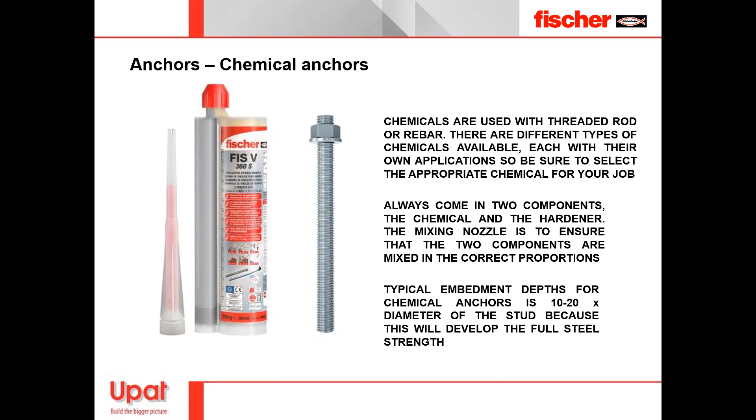So you get different types of chemicals, and each one has its own characteristics and properties. A bonded anchor is an anchor that's set into concrete after the concrete has been poured, and basically you get capsule systems or injection systems, and that's broken down into either polyesters, vinyl esters, or epoxies. Those are the three different types of chemicals which all the major manufacturers use to manufacture their products.

Epoxies are really the top of the range. Epoxies can be used where the hole has been cored, and epoxies can be used underwater. Epoxies take a long time to set, and typically an epoxy has a cube strength of around 120 MPa. One of the very well-known epoxies is the Hilti RE500, and the Fischer equivalent is the FIS-EM.

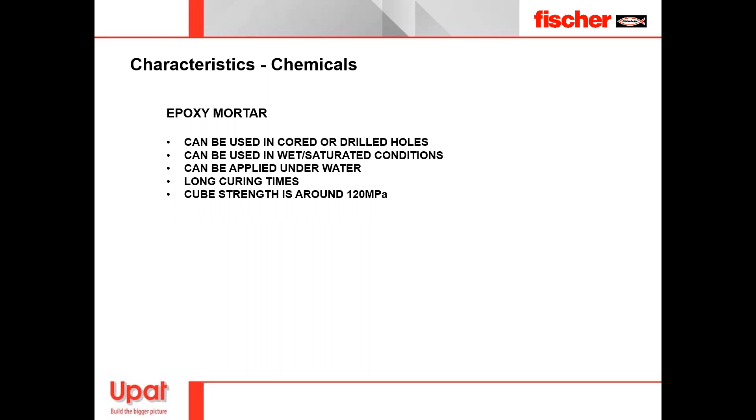Then you get vinyl esters, slightly lower performing. Not all vinyl esters can be used in cored holes; some of them can only be used in drilled holes. Some vinyl esters have cement in their hardener, so be careful, as they cannot be used in wet holes. Curing time is much shorter than that of epoxies, and they have a cube strength of around 100 MPa.

And then basically at the bottom of the ladder is polyester-based chemicals, not recommended for structural applications. Polyesters are sensitive to moisture, and if they're continually exposed to moisture, they're going to eventually lose their strength, and we'll see that in one of the case studies a bit later on. The cube strength is around 60 MPa.

So when one is using chemicals, you have to consider: has the hole been drilled or cored? Is it a wet or a dry hole? What are the curing times? What are the long-term temperature conditions? Has the hole been properly cleaned?

People always go on about price. Polyester is the cheapest and the lowest performing. Epoxies are the most expensive and the highest performing.

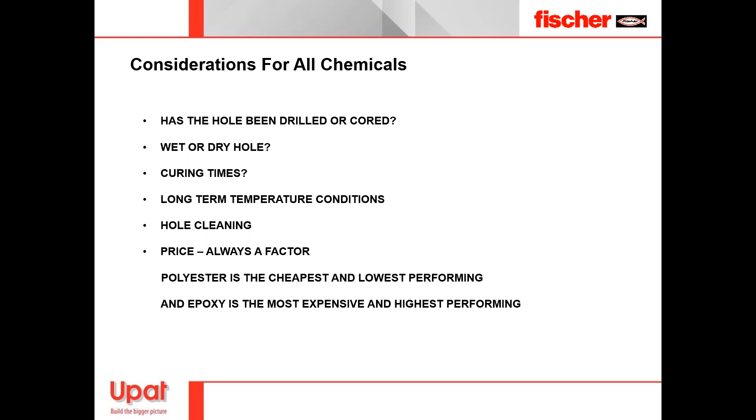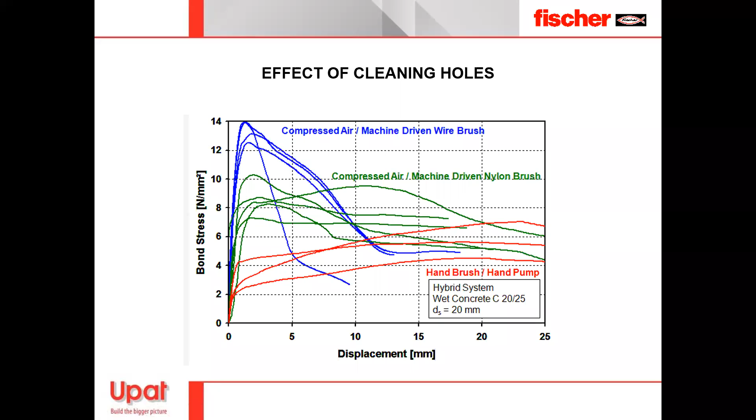Then if you go up with a cleaning effort, compressed air, machine-driven nylon brush, you can achieve higher bond stresses. And then compressed air, machine-driven wire brush gives you the best result. So really, all that boils down to is that the better the cleaning effort, the better the result you're going to get.

Okay, installation of a chemical in concrete. This is a Fischer training video. It's just illustrated to show you what needs to be done.

So the hole is drilled. It must be cleaned out. Blow, brush, blow is what all the manufacturers specify. And blow again.

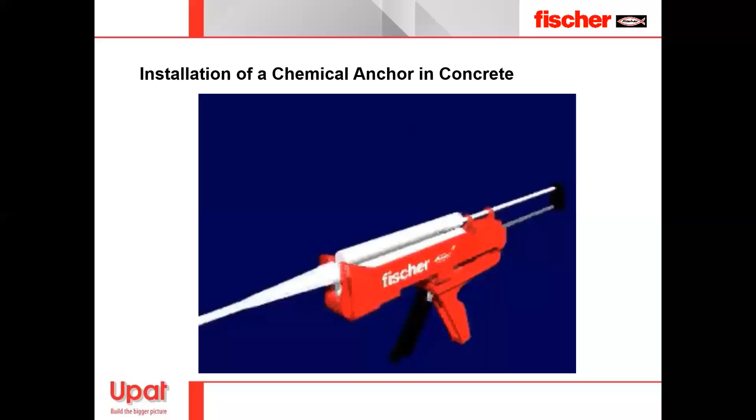That's a typical dispenser gun. One always has to give it about 2 or 3 squirts first before injecting in the hole to make sure that it's uniformly mixed.

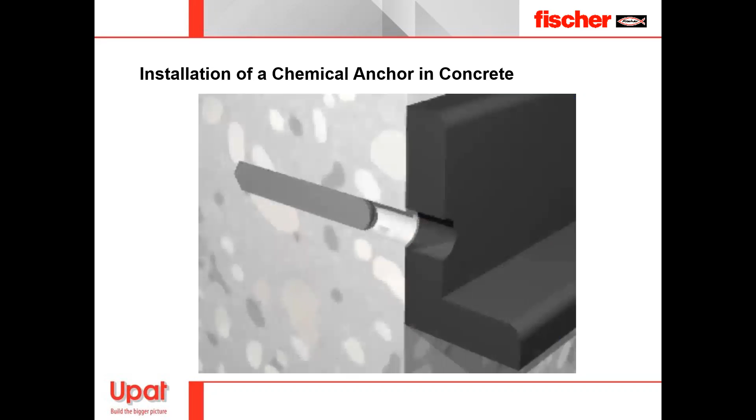Typical rule of thumb is you fill the hole about 2/3 of its depth with a chemical and then turn the threaded rod in to get maximum surface area contact between the chemical and the stud.

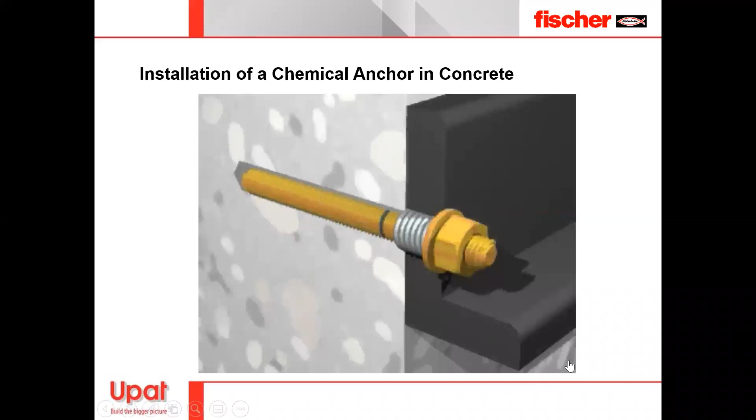And curing time depends on temperature. And that is the installation of a chemical anchor.

Then you get expansion anchors, and an expansion anchor comes from the old Rawlbolt. I'm sure everybody's familiar with the Rawlbolt, and these work on exactly the same principle. You have a wedge at the bottom end of the anchor with a clip, and as the anchor is tightened, that clip expands against the wedge and locks in the concrete.

A big advantage of this type of product over the Rawlbolt, and I'm not knocking the Rawlbolt, but its technology has been superseded, is that you can take any one of these anchors, either an expansion anchor or a chemical anchor, put your base plate down on the concrete, drill through the holes into the base plate and fix the chemical through those holes, which you cannot do with a Rawlbolt.

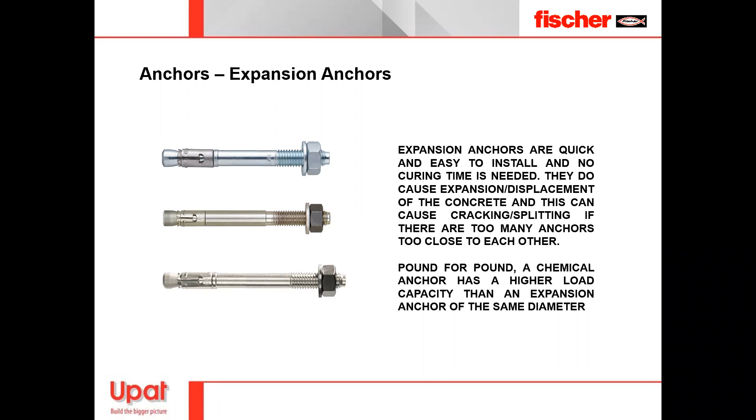An advantage of an expansion anchor over a chemical anchor is that expansion anchors can be loaded immediately. You don't have any curing times to worry about.

Then you get what's called an undercut anchor. An undercut anchor is basically an under-reamed anchor where a conical shaped hole is made in the concrete and the anchor is then set into the concrete. Very high performance, but they are expensive because they need special tools in order to install them.

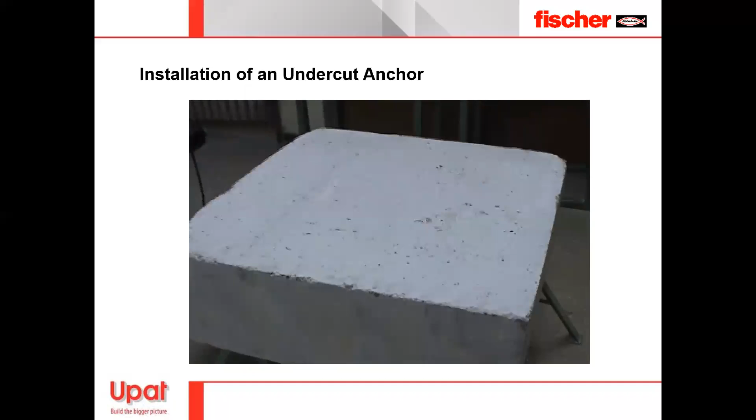So here is a video of the installation of an undercut anchor. I'm showing this because you'll see what happens at failure. You can see there's a special drill bit that is needed.

So the first thing they do is they drill the cylindrical hole. And now he's going to under-ream it. By reaming it in that manner, that creates the conical shape of the hole.

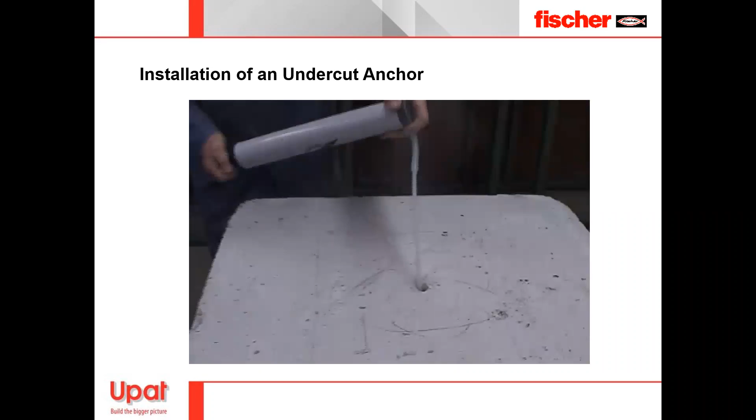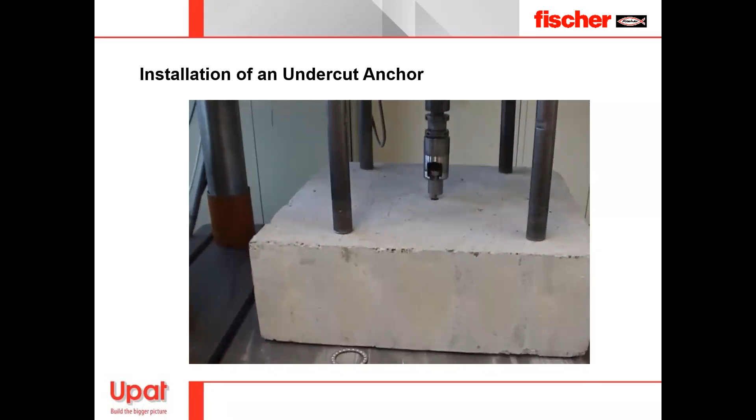And that anchor has a sleeve which is knocked down and it opens up on the inside of the hole. But you can see you need that special setting tool. So the anchor is protruding, the sleeve has gone all the way down. And now it is being tested to failure.

You can see this is a very old video by the type of computer that you're looking at. But the principles still apply.

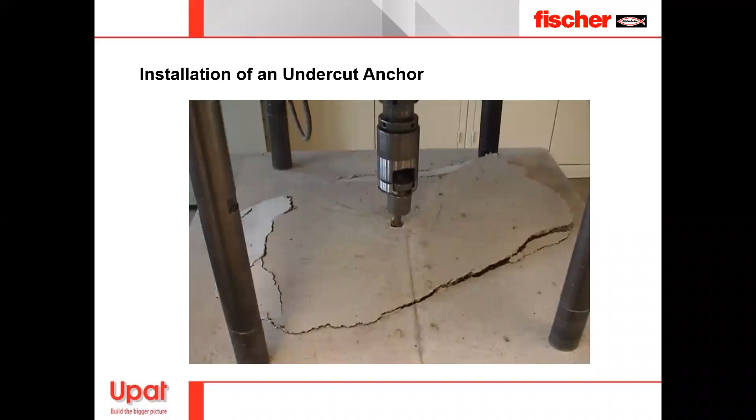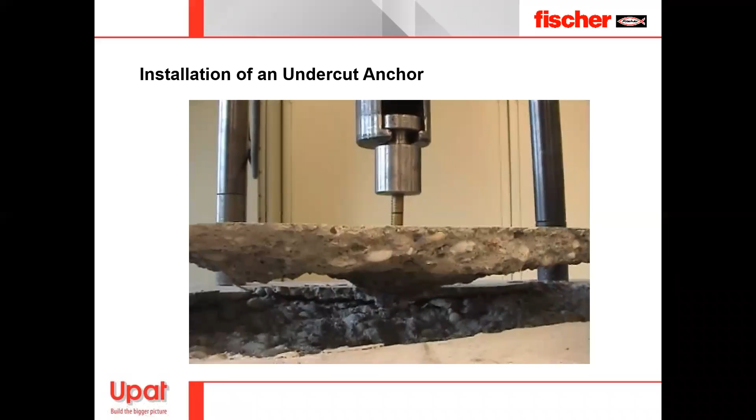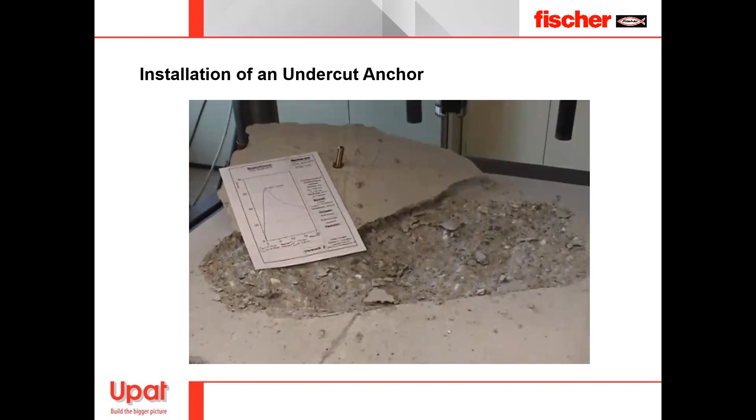So it has been loaded to the point where the concrete has failed. Now take note, you can see how the sleeve is opened up on the inside. And that is what we call the typical cone failure of the concrete. Cone failure is very prevalent, and it forms an important part of anchor design. There we go, that's the concrete cone. And that is actually a tensile failure of the concrete.

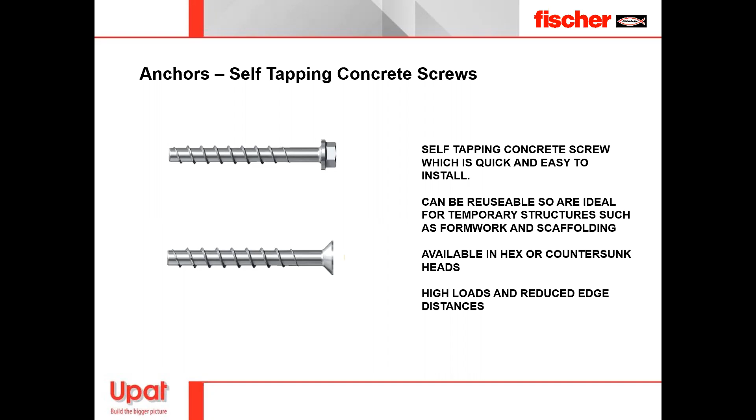Okay, then fairly new on the market is what they call self-tapping concrete screws. Quick and easy to install. They can be reused, and also because they can be removed, they're ideal for temporary structures such as scaffolding and formwork. They are becoming more and more popular. And the design principles are exactly the same, whether you use a chemical anchor, an expansion anchor, or a self-tapping concrete screw, the principles remain exactly the same.

Okay, so that's the code. The code comes from the Eurocode, and we, together with Hilti, and thanks to Professor Peter Day, got this accepted as part of the SANS code. And what this does is, when a group of anchors are acting together,

there are 4 possible failure modes in tension and 3 possible failure modes in shear. And the design then checks the resisting load for each possible failure mode and looks at the decisive case, and it does the same for each possible shear failure mode, then combines tension and shear, which your structures guys will know all about.

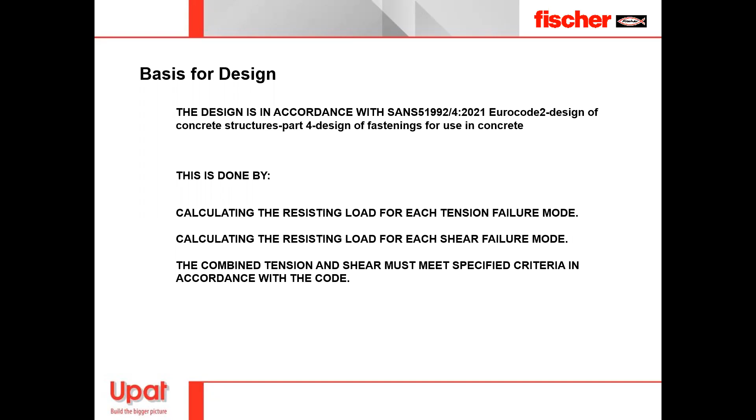So, if an anchor is in tension, the first possible failure mode is steel failure, direct failure of the steel, where the steel will fail in tension. That represents the upper limit on the load capacity of an anchor.

You can get concrete cone failure, which we've seen, and the diameter of the cone is typically 3 times the embedment depth of the anchor.

So this is now when the design principles start coming in. If an anchor is in tension and you have concrete cone failure, you can see that's the volume of concrete that is resisting that tension load.

Now, when you start spacing anchors close to each other, you will see that there's a bit of an overlap. So what this design philosophy code does is it takes the load capacity of a single anchor, and then it makes a whole lot of adjustments according to the geometry, applying adjustment factors to the basic resisting load for a single anchor.

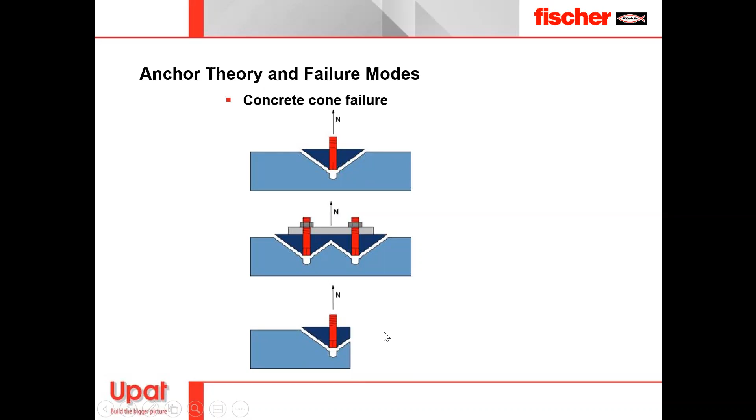Okay, then you can get pull out, pull through, which means that the anchor just pulls out. If you have an expansion anchor, normally that happens if the hole has not been drilled to the correct diameter, if the hole is too big.

For expansion anchors, the diameter of the drill hole must be exactly the same as the diameter of the anchor. For chemical anchors, the diameter of the drill hole must be a couple of millimeters larger than the diameter of the stud or the rebar, because you want to have that chemical all the way around in that annulus between the hole and the stud.

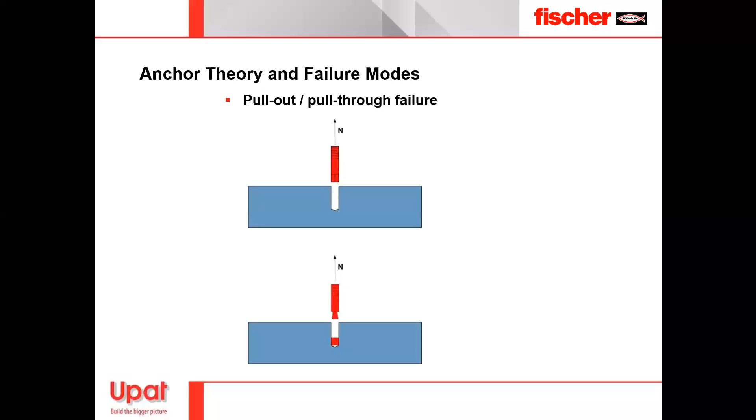And then you can get concrete splitting. This happens typically with expansion anchors. If a big bunch of expansion anchors are too close to each other, they will create splitting. Splitting is also prevalent when the concrete section isn't that deep, if it's relatively thin. If you've got a big, deep block of concrete underneath these anchors, then the chances of splitting are reduced. So splitting happens typically in thin sections.

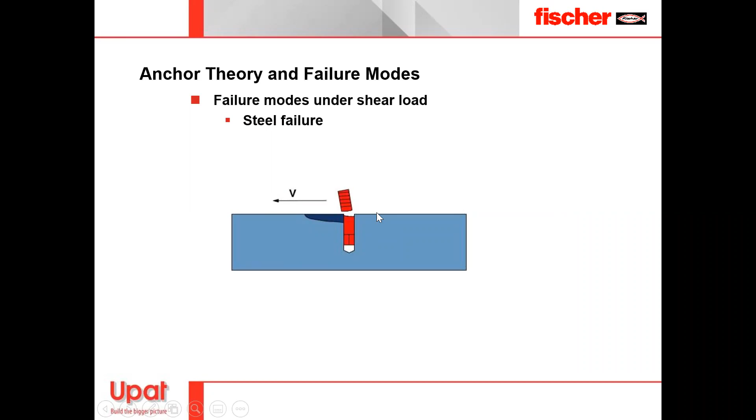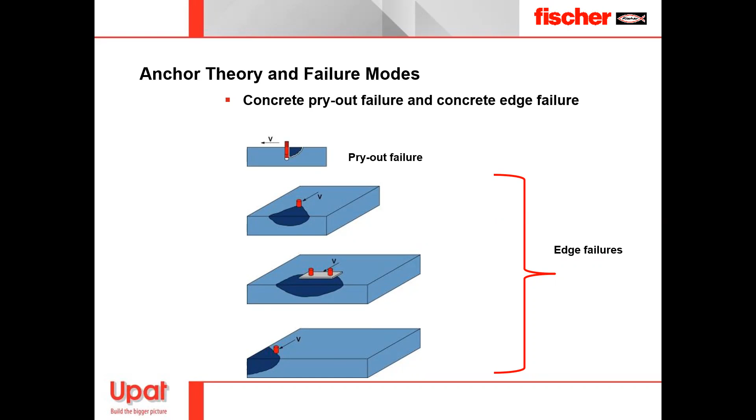In shear, you can get direct steel failure, where you've got a shear load and that's what happens to the anchor. That's normally not the decisive case. Then you get pry out and edge failure. Pry out is a shear load when that anchor pushes a wedge of concrete out behind it, and that's actually also a tensile failure of the concrete. Edge failure is where you have a shear load and there's just not enough concrete resisting that load, so you get failure on the edge. Each one of those failure modes has to be considered, and the worst case is the one that's decisive. The resisting load must always be greater than the applied load.

Here's an example of pry out. So it's a big shear load being applied, and the concrete breaks out at the back.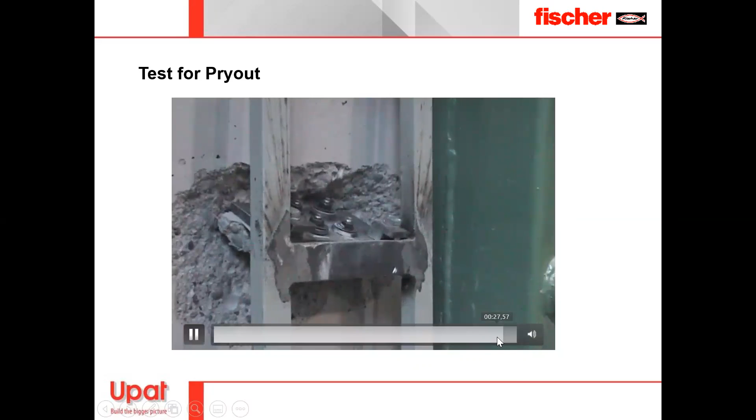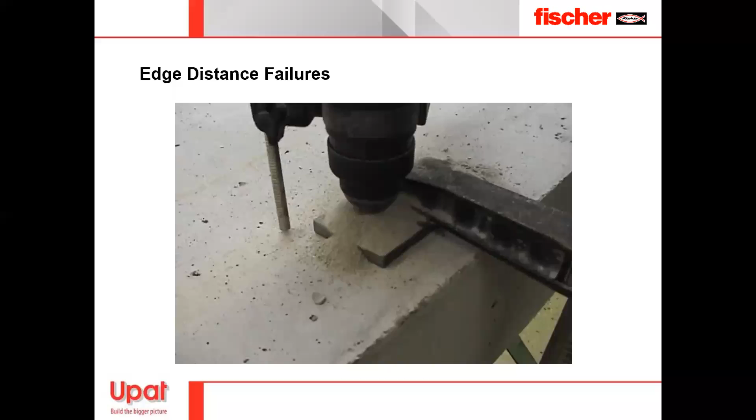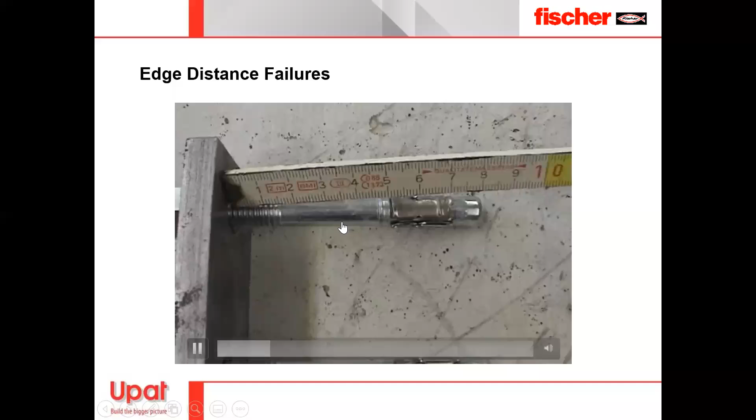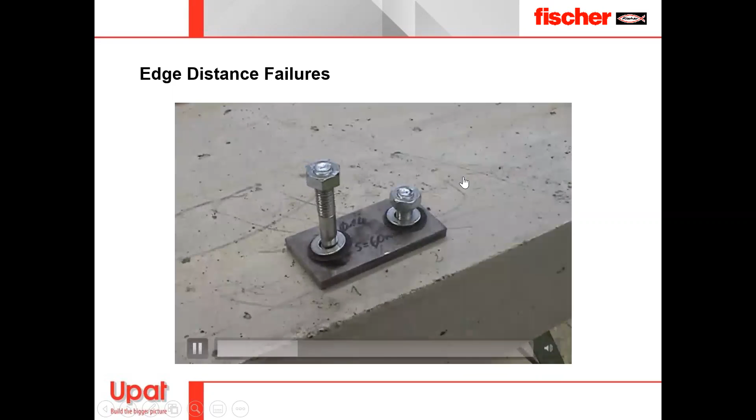Here's an example of edge failure. This has been done with expansion anchors, very close to the edge of the concrete, and they are set quite close to each other. So they're spaced close to each other, and the edge distance is 55 millimeters. That would typically be a 12 millimeter diameter anchor, and the drill hole must be 12 millimeters as well. You'll see all these expansion anchors have rounded heads to prevent the threads from being damaged while the anchor is being knocked in.

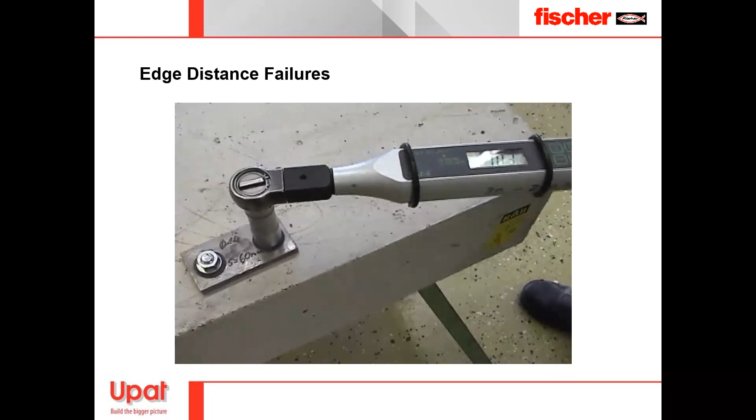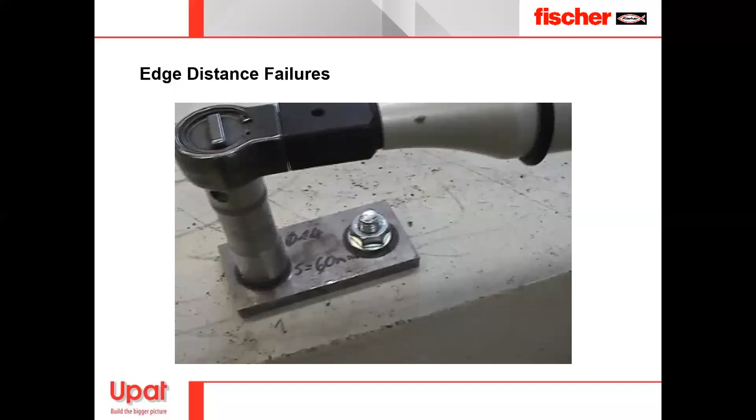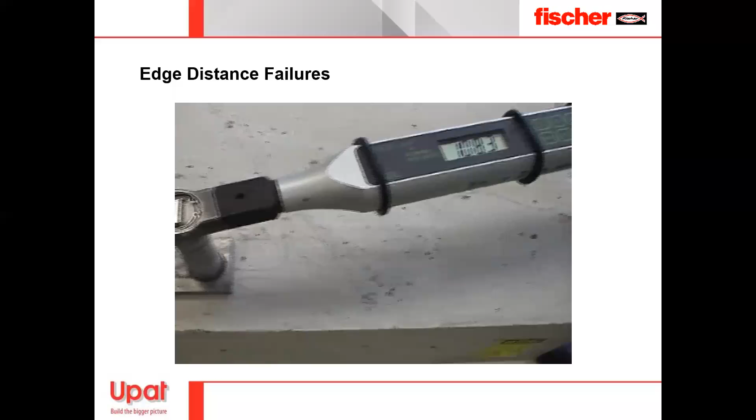Now what he's going to do here is just over tighten them. The installation torque for that product is 12 Newton meters, that's what he's trying to tell you. That's important - every expansion anchor does have its own installation torque. The problem we find on sites is that not always do you see a torque wrench on site. So it's been tightened up, and that's actually causing expansion of the concrete. It's going to almost 10 times more than the specified torque. And that is what happens.

I think that has been made pretty clear what has happened there. Let us continue.

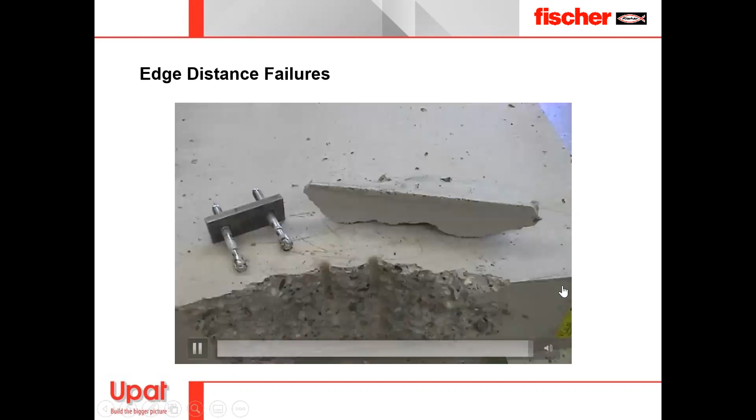As I said, the resisting loads for every possible failure mode are calculated, and adjustment factors are applied. For cone failure, this is an empirical formula developed through lots of trials, and the resisting load for concrete cone failure is K1, a factor depending on whether the concrete is in tension or compression, multiplied by the square root of the cube strength times the effective depth to the 1.5. That is done for every failure mode, and that is how the resisting load is calculated, plus all adjustment factors.

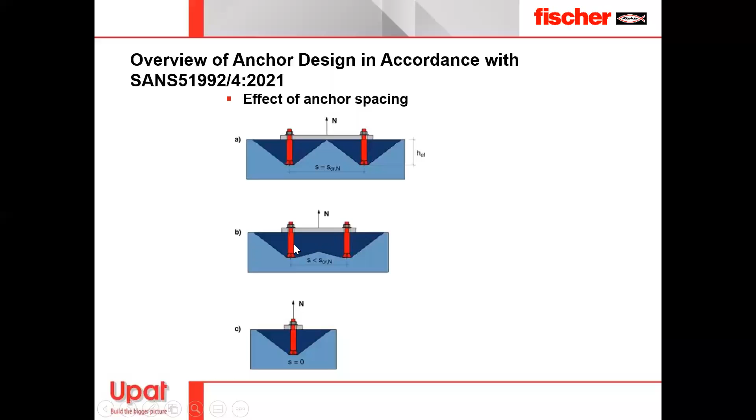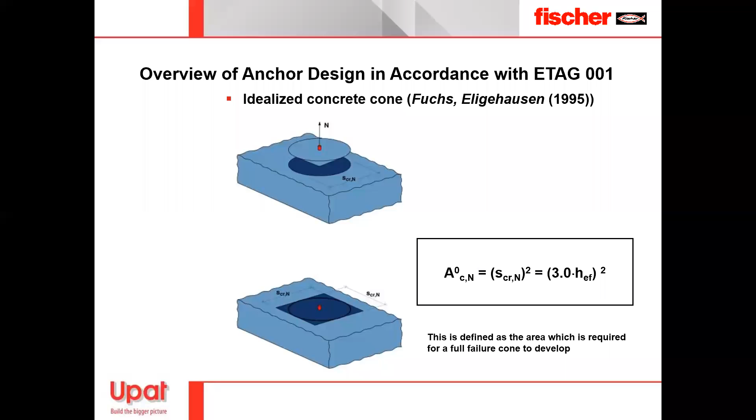Let's have a look and see what I mean. You can see anchor spacing - if the circles of the two cones are just touching, then they don't have an effect on each other. But as the anchors get closer, you have an overlap of the cones. What the code says is that an idealized concrete cone is the area of concrete that is required for the full cone to develop. In this particular instance, that is the idealized area we're talking about, which is just diameter times diameter. It's the area required for a full failure cone to develop.

Now, when you have two anchors, what the calculation does - and I'm showing you this because if you use our design software, the fischer design software or the Hilti design software, they're both based on the same code - you'll see this a lot, which is basically an adjustment factor. It's the actual area of the geometry of that configuration divided by the idealized area. That's all that is doing. But you'll see those calculations a lot if you use the software.

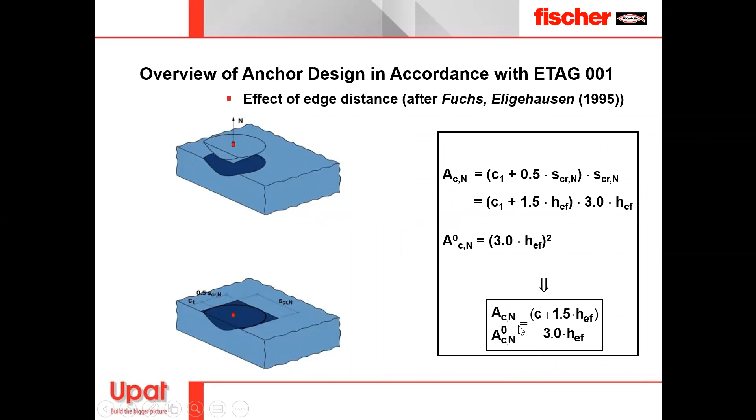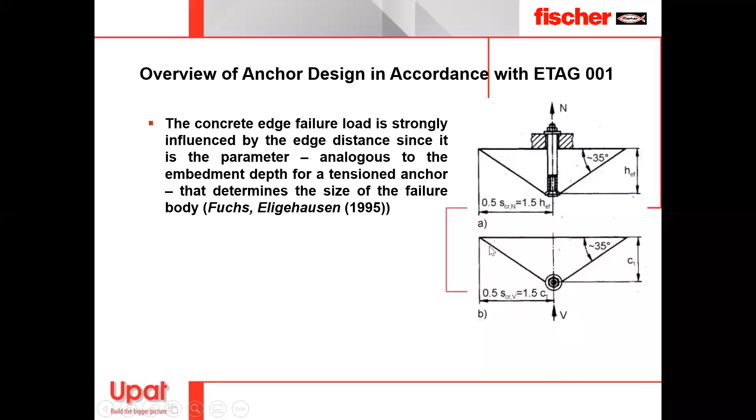Same with edge distance - the adjustment factor is the actual area over the idealized area. And then you get exactly the same thing with shear loads. That is a diagram of an anchor in tension with the development of the cone. If you apply a shear load, you get that same dispersion, and this is the volume of concrete that is resisting that shear load.

Okay, so they do exactly the same thing with shear loads, where you get that would be the idealized area.

That's a 35-degree angle. C1 is the edge distance, and that dimension is 3 times the edge distance. And the depth is 1.5 times the edge distance.

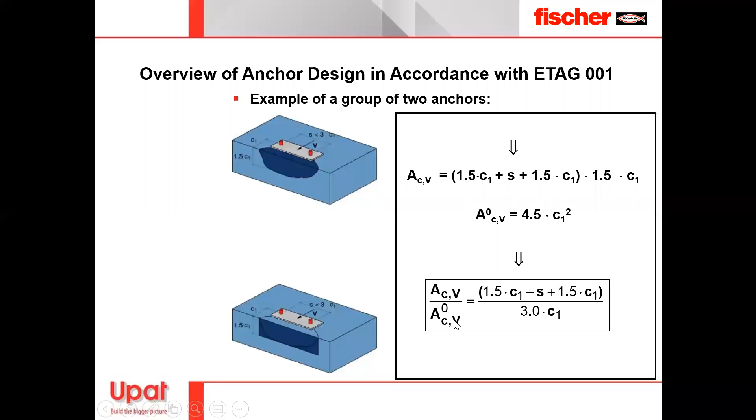Okay, so once again, then you'll see the adjustment factor, which is the actual area divided by the idealized area. And that's how the design works for all failure modes.

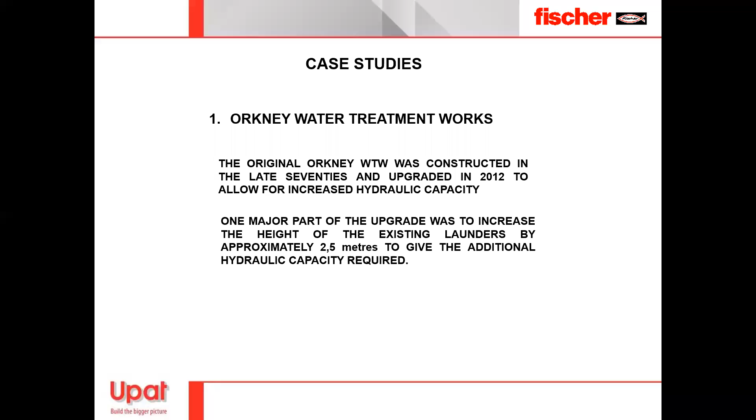So now we're going to do a couple of case studies. And the first one is at Orkney Water Treatment Works. Original water treatment works was constructed in the late 70s and upgraded in 2012. One part of the upgrade was to increase the height of the existing launders by about 2.5 meters to give more hydraulic capacity.

The existing walls had to be strengthened to take the additional hydraulic head. This was done by tie beams inside the launders, anchored onto the inside walls. So let's see what happened.

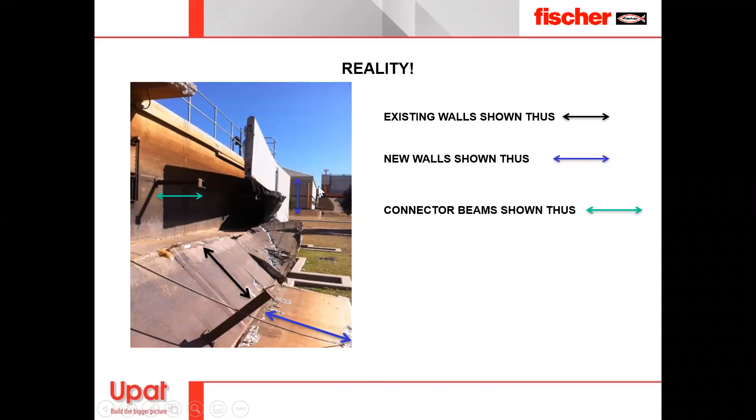And how did that happen? You can see there the wall pulling away due to the hydraulic pressure. The pressure was, there was something wrong with the anchor, and the whole wall pulled away. Now, why did it pull away?

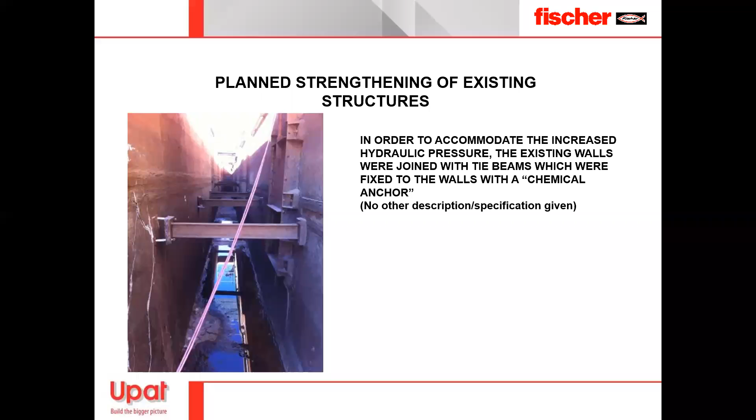This collapse took place, and of course the supplier, being fischer, were called and were told that we supplied an inferior product, which is always the case when a failure of this nature takes place. They always go to the supplier and query the supplier.

The contractor that did the work is one of our customers, and we then looked into the specification, and the specification said nothing other than tie beams must be fixed to the walls with a chemical anchor. That was it. No other description was given, no other specification was given. That was it.

So what did the contractor do? As all contractors do, he went for the cheapest possible chemical that was available, which was polyester. And we went back on our records, and our sales records did show that at the time that this was done, we sold this contractor a lot of polyester chemical.

And there was no advice that was sought by the contractor or by the consulting engineer. This guy came in and just said, give us X tubes of this polyester. And so no question was asked where it was to be used. And polyester, and this is what happened.

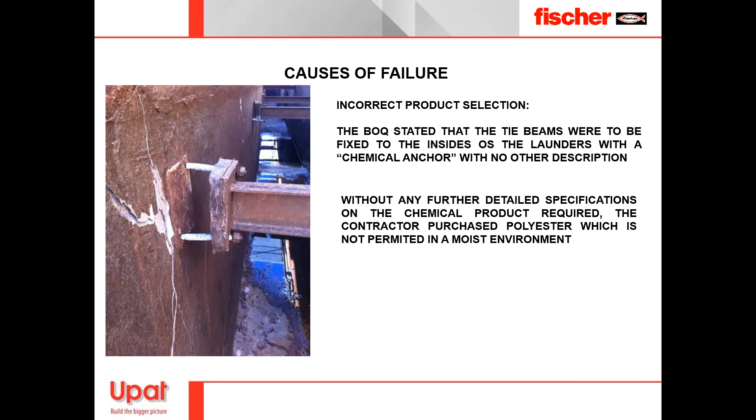Polyester is not permitted in a moist environment. Polyester is like soap. If it's exposed to moisture, it becomes soft and it weakens.

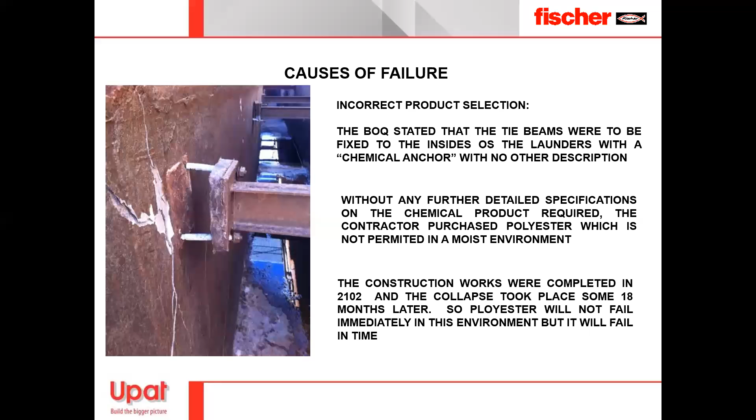It didn't fail overnight. The works were completed in 2012, and that collapse took place about 18 months later. We were called in to do this examination investigation in about July, August of 2013. So it took time for this to manifest itself. It didn't fail immediately, but it did fail, partly because polyester was completely the incorrect chemical to be used in those conditions.

The other reason that there was failure was because the insides of these walls were pretty much like a spider's leg. They weren't straight. They were wavy all over the place.

And the contractor had one fixed length of tie beams. And so there were plenty of gaps in between the base plates and the surface of the concrete. And these irregularities were made up with a grout packing in between the base plates and the walls. There's nothing wrong with that, but...

The anchors that were purchased from us were all a fixed length. Now, the more grout that you pack in there, the less the anchor is embedded into the concrete. And the strength, the tensile strength of an anchor depends, especially a chemical anchor, it depends on its embedment into the concrete. And there was up to 60 millimeters of grout.

Now, that's fine. There's nothing wrong with that. But then the correct embedment depth should have been used. In other words, the contractor should have purchased anchors which were 60 millimeters longer than the ones that they used to take account of that up to 60 millimeters of grout.

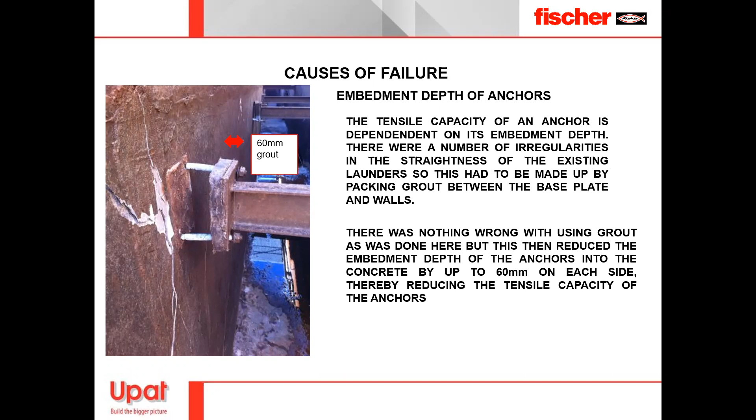I've just seen so many cases where there's clashes with rebar. So what does the contractor do? He just cuts the anchor so as to avoid clashing with the rebar, and that reduces the capability and the load capacity of the anchor. It's as simple as that.

Incorrect anchor selection can lead to injuries or fatalities. Very lucky there was no injury or fatality here. It happened on a Friday evening, and there weren't too many staff on the plant. You can see that's a total of about 5 meters high concrete wall, and that whole thing collapsed. That could have resulted in fatalities. Lucky that nothing happened there.

Another one, a rugby grandstand at a school in the Western Cape. We were approached by a loss adjuster to give our opinion on what happened here. At the time, there was a claim going on between the client, the consulting engineer, and the contractor, a big fight going on. I asked if we could use this as a case study, and we were given permission, but no names. So I don't even know, I just know it took place in the Western Cape. I don't know the name of the school, the contractor, or the consulting engineer.

But there we go, failure of a rugby grandstand. It was caused by very high winds. The structure was under-designed, questionable anchor selection, and in some places the hole cleaning was insufficient and chemicals may not have been used to spec. The outcome of this case, which was resolved after I prepared these slides, was that the consultant actually paid for 80% of the cost of the remedial work, and the contractor paid for 20%. In my opinion, it could have been a bit more equally split, but that was the outcome.

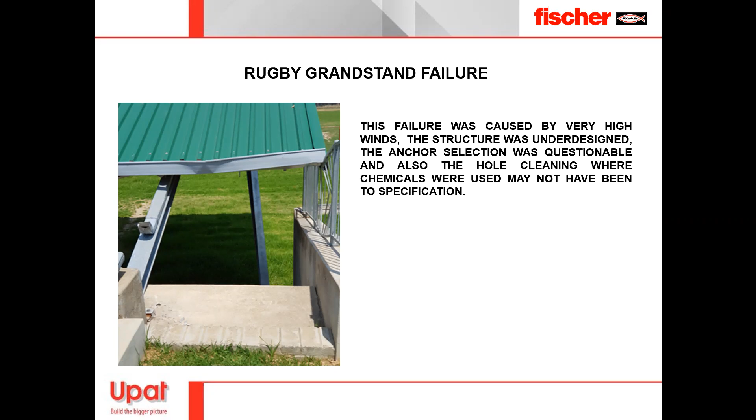Two different types of anchors. The fact that the base plate was deformed indicates it was overstressed, under-designed. Screw bolt on the right, chemical on the left. Also see the screw bolt is a little bit rusted, meaning maybe the hole was drilled a little bit bigger than it should have been.

Now I want to point out, we'll see a few more examples of this, and I am watching the time, Chris. There is no code in the world anywhere that allows different types of anchors in the same group. Apparently this contractor had some anchors left over from a previous contract, and it was agreed to mix and match these anchors, which there is no code that allows.

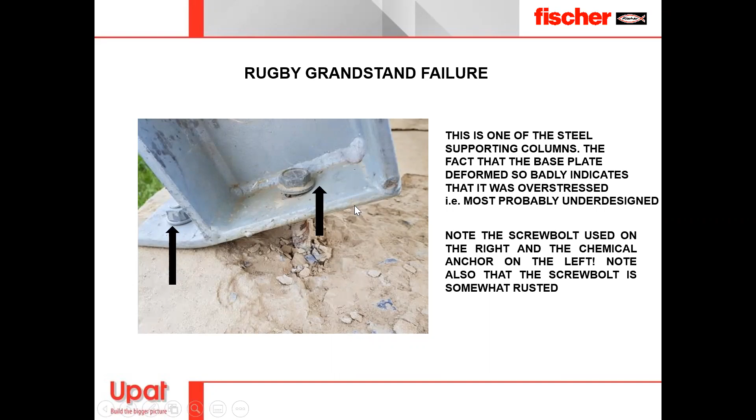So there we go, have a look at that. That's a screw bolt, and that is a chemical. There you can see some concrete cone failure. The fact that the chemical anchor is pulled out with the chemical wrapped around the stud indicates to us, and we've seen this many times, that probably the hole wasn't properly cleaned.

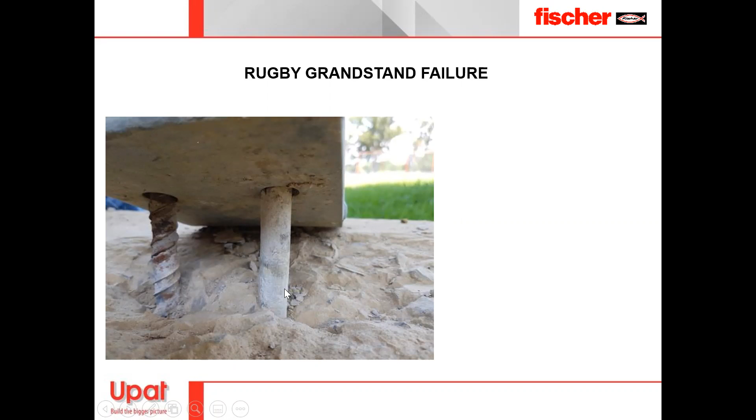Again, different types of anchors in the same group of anchors, which is absolutely not permitted. Both anchors failed by pull-out, probably due to high loading. When you get that with a chemical, it also means the hole may not have been properly cleaned.

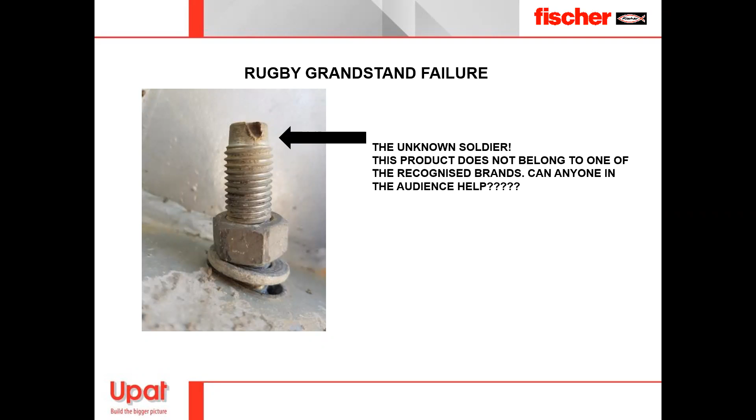There you see it again, different anchors in the same group. That we don't know - that's not one of ours, that's not one of Hilti's. Who knows where that came from? Maybe that came from Builders Warehouse. Who knows?

There you've got a cone failure. This is an example of cone failure, meaning the capacity of the concrete was exceeded, meaning the loads were too high.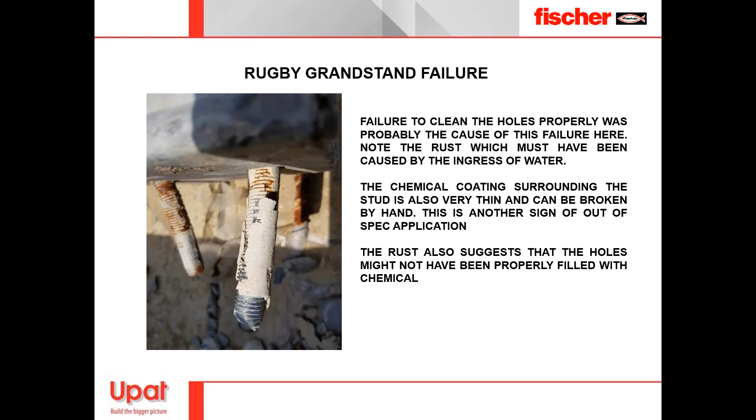If a hole is properly filled with chemical, the rule of thumb is the hole must be filled about two-thirds, and then you insert the stud. If there is sufficient chemical in the hole, the stud will displace the chemical to the point where it is flush with the surface of the concrete. That was clearly not the case over here.

So with the under-design, you may not use different types of anchors in one connection. Who knows what anchors were used? Some holes were not properly cleaned. Not enough consideration from both parties of the consequences of failure.

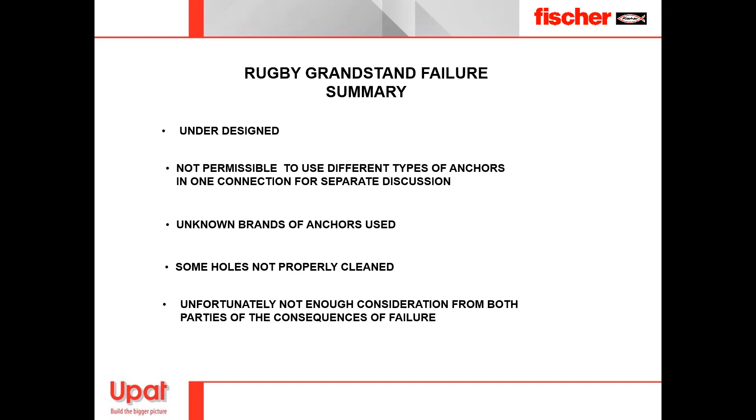This is just very quickly the risk of mixing different brands. I've seen on sites many times where a contractor will use a product from Fischer, and then use a Hilti equivalent. That's very, very dangerous. Just don't allow that on site ever, because if there is a failure, both suppliers will just say, prove to us that it was the Fischer product that failed, or prove to us that it was the Hilti product that failed. You'll find both suppliers will just step back and say it's not on to prove which product failed.

Because once an anchor is set into concrete, our products are made from polyester, vinyl ester, or epoxies, and so are our opposition's products. Once it's set in the concrete and you have a failure, it's very difficult to pinpoint what brand it was.

Be careful of over-the-counter purchases. I've seen failures take place, and you ask the contractor where he bought these anchors from. Oh, they came from Builders Warehouse, for example. Now, I am not knocking Builders Warehouse at all, please don't get me wrong. But if you go and purchase an anchor from Builders Warehouse and ask the salesman for a load chart for that particular product, he won't know what you're talking about. That's the risk of buying from hardware stores and people who don't actually understand the purpose of these anchors. So be very, very careful about that.

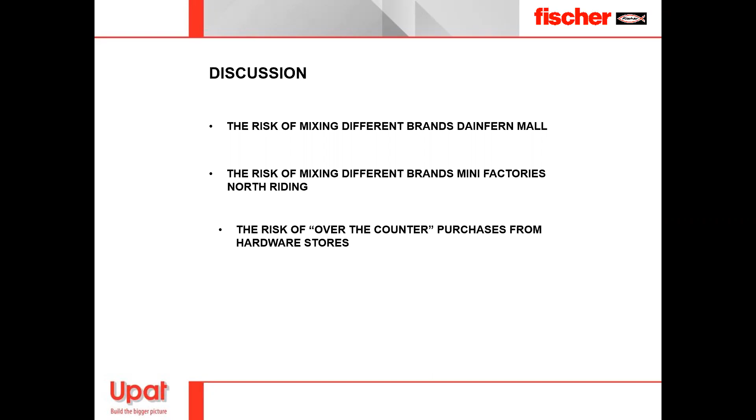Okay, we're going to do one or two more case studies. I'll go through this fairly quickly.

This was during the construction, the upgrade of the Rosebank Mall a couple of years ago, I think 2012, 2013. Part of the shopping area was kept open, and other parts were cordoned off to allow for construction. Temporary hoardings were placed between the construction areas and the live shopping areas to separate the shopping area from the construction activities.

There was a collapse of a temporary hoarding, and that's what it looked like. That's the temporary hoarding.

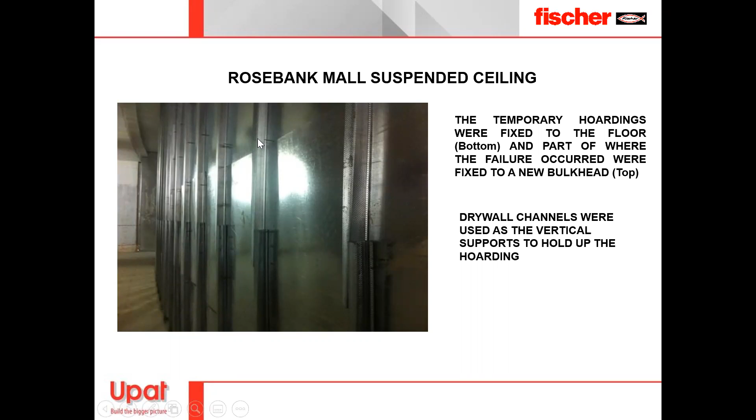It consisted of drywalling and drywall channels, which were fixed to the floor at floor level, and actually fixed to a bulkhead which formed part of the permanent suspended ceiling. And that, for me, was a mistake - to fix any temporary structure to a suspended ceiling. Fixing anything to a suspended ceiling is, to my mind, not such a smart idea.

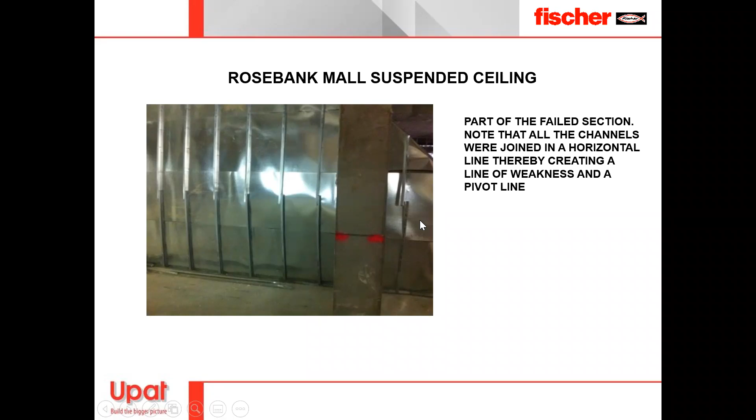Those are the drywall channels. Look at that - all of these channels were joined in the same line, and that created a line of weakness and a pivot line. So that certainly is one of the contributing factors towards this failure. If these joints had been staggered, you would have reduced the possibility of that happening.

Okay, there it is again. There you can see all of these drywall channels were joined at the same point in the same line, and that was definitely a plane of weakness. Had the joints in the temporary columns been staggered, this might not have happened. Also not a good idea to fix the top of the hoarding to a ceiling bulkhead.

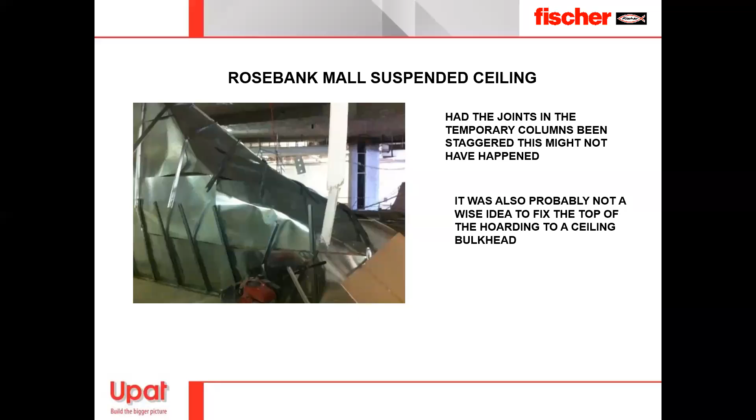So on the ceiling collapse, once again we were called in because it was our fixings used to carry the suspended ceiling. We did about 120 different load tests on the actual anchors used, and got the ceiling supplier and contractor in. The supplier, the ceiling, came from Saint-Gobain - I'm sure a lot of you know who Saint-Gobain is. We got the loads accurately calculated and did a lot of tests, and it certainly wasn't the anchor that failed.

But probably the temporary hoarding was bumped, and it happened after hours. This pulled the bulkhead, and because you had that plane of weakness, the whole thing came down.

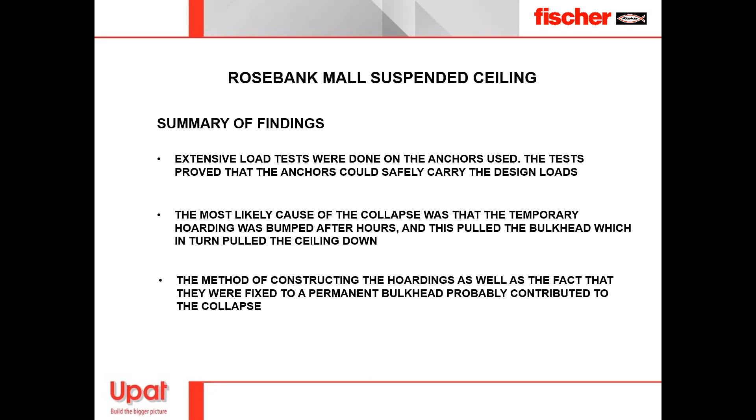Okay, and I've got time for one more case study, which is very, very interesting. Let's go to Nubia Business Park. This took place in Durban a couple of years ago. Conventional construction - concrete columns, concrete beams, concrete slabs with brick infill in between the columns.

And the structural steel, steel trusses, were set into the tops of the concrete columns. There was one heck of a wind which blew, which took place on a Thursday evening, and that just lifted the roof off. This was during the course of construction that this happened, and it just lifted most of the roof off completely. You can see the damage. And once again, the anchors - one of our products was specified to fix the steel trusses to the tops of the concrete columns.

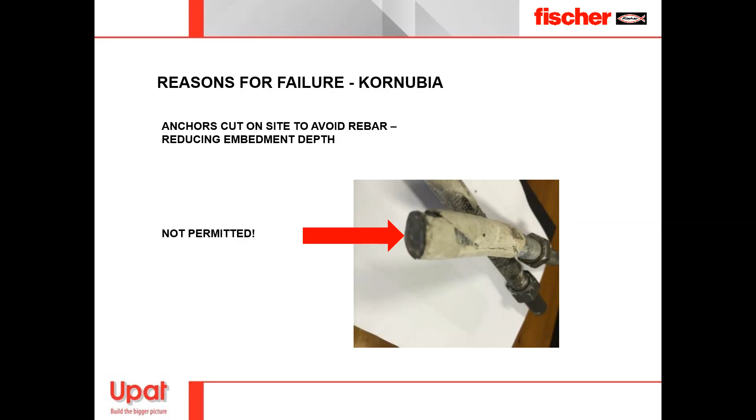So we were called out to have a look, and this was one thing we saw: anchors cut on site to avoid rebar, reducing the embedment depth. And that chemical looks brittle, suggesting that the chemical wasn't properly mixed. There you can see it's been cut - that's not permitted, you've got to take the anchor to its full depth. The chemical around the stud appears brittle, indicating insufficient mixing or insufficient cleaning.

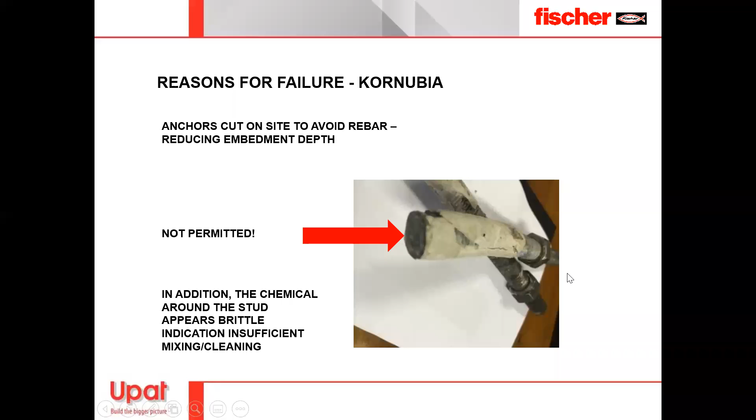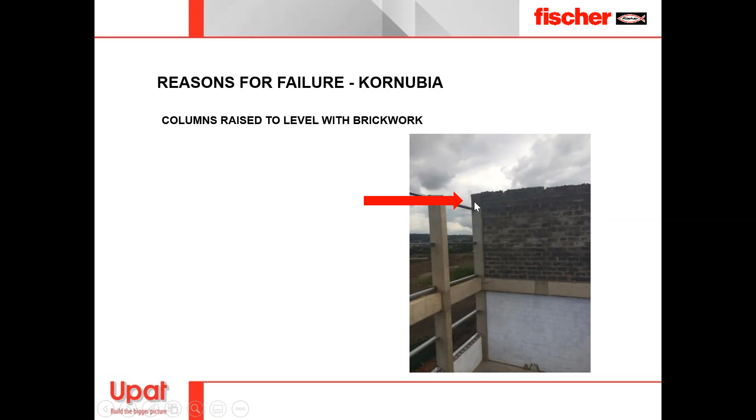And in other places, have a look at this: the columns were raised to their correct level with brickwork, and the brickwork was then plastered to make it look like concrete. Then the structural steel trusses were set using our products into the brickwork. No, that's not good engineering at all. And it certainly wasn't product failure.

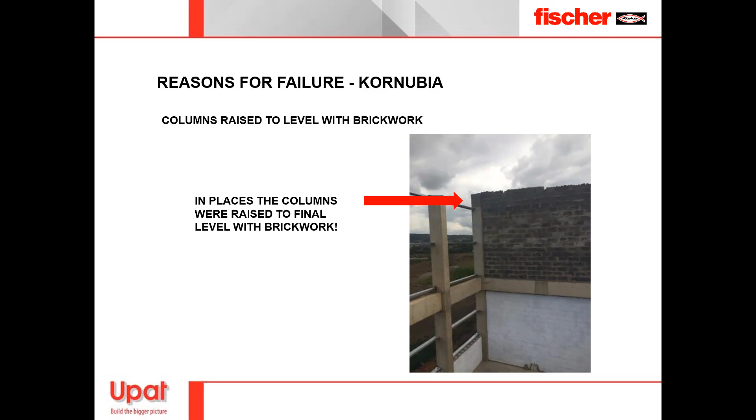So there we go - it was very bad weather that lifted that roof off. Anchors were cut, and where the columns were not cast to the correct height, they were brought up to height using brickwork, and anchors were set in brickwork - and a couple of layers of brick have got no tensile capacity.

Again, our products were found on site as well as Hilti products. This failure was not product failure, but once again, if that had been the case, it would have been very difficult to prove which was the guilty party and which was the guilty product that failed. Once again, both suppliers would have just stepped back and said, well, prove which one is it.

So we're just about out of time, I'm not going to go any further. So to everybody there - installing anchors is not rocket science. You just got to make sure that the holes are properly cleaned and the chemical is properly mixed. Don't cut the anchor short, because then you're affecting the capacity of the anchor. And be very, very careful about using different brands on the same site, because you're just leading with the jaw there, honestly.